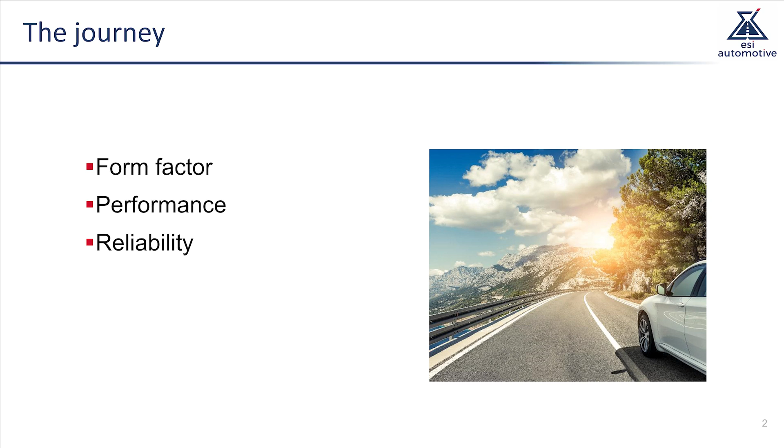Today, we will discuss the testing required for ADAS and explore a necessary material change to achieve enhanced reliability. The focus will be a high reliability solder alloy. As we create a supercomputer on wheels, we have to consider the significant influx of electronics in each system and what that means for overall vehicle reliability.

So what exactly is meant by a supercomputer? Well, a basic definition states that it has great speed and memory, thousands of times faster than a personal computer. And this is directly relatable to a car's central computer. It must be able to make very quick, informed decisions. It will gather information on its surroundings, pull from a historical log of experiences, previous situations and programs to make an accurate, safe next move.

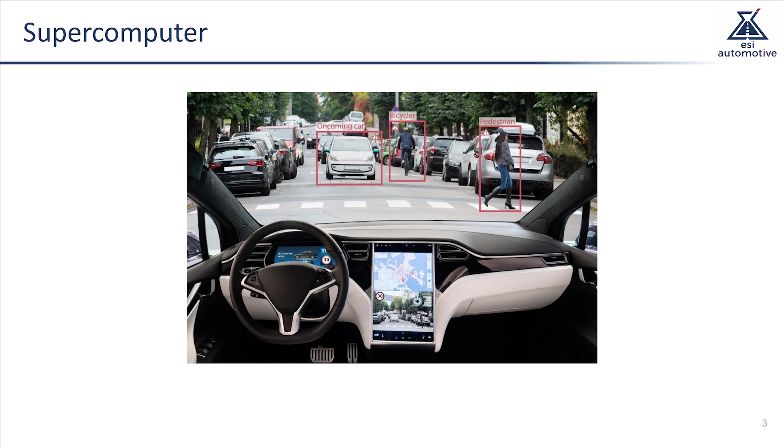Think about yourself. Think about how much information you're taking in when you're driving on a congested highway and you want to change lanes to get around a car that has abruptly stepped on its brakes in front of you. It seems like a basic concept to someone who's been driving for many years, but there's a lot of information to take in and react to all in a fraction of a second. Now we're going to turn this decision making over to a machine that can wear or degrade.

So in our previous installment, we discussed the effect of printed circuit board materials on 77 gigahertz radar designs. Staying close to that theme, today we'll look at the joining materials used for connecting the components to the printed circuit board. We will consider the necessary life expectancy of these systems and the challenges associated to radar, as well as all other advanced safety.

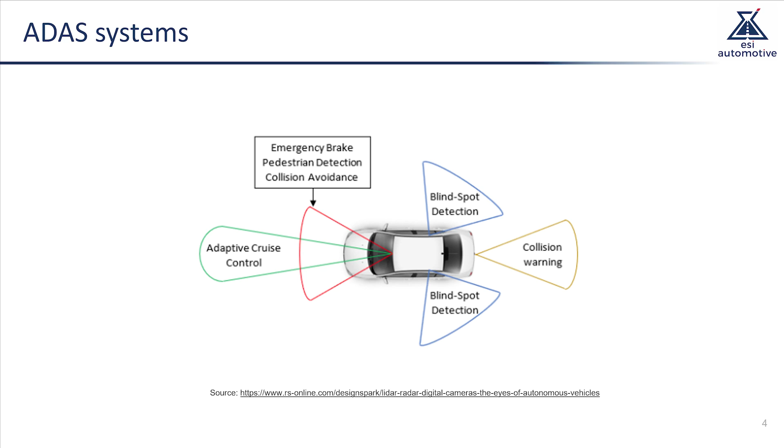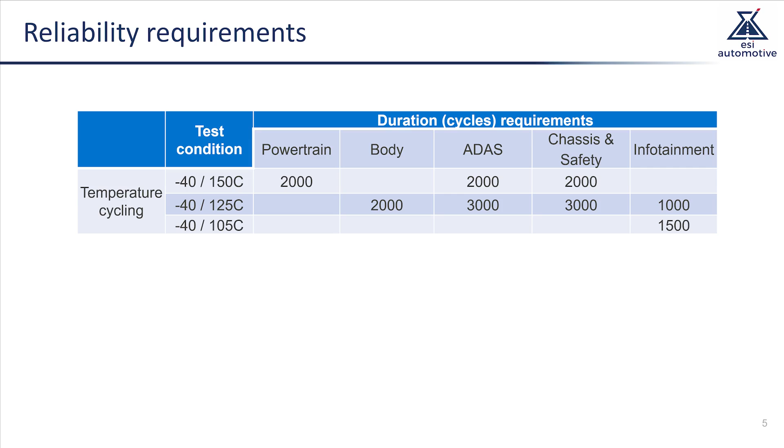Car makers are putting stringent test requirements on ADAS systems. You can see from the chart that the advanced safety systems require the highest number of thermal cycle exposures. But the greatest concern for an electronic system is thermal fatigue. Thermal fatigue is defined as the gradual deterioration and eventual cracking of a material, usually metal. It's a result of alternate heating and cooling.

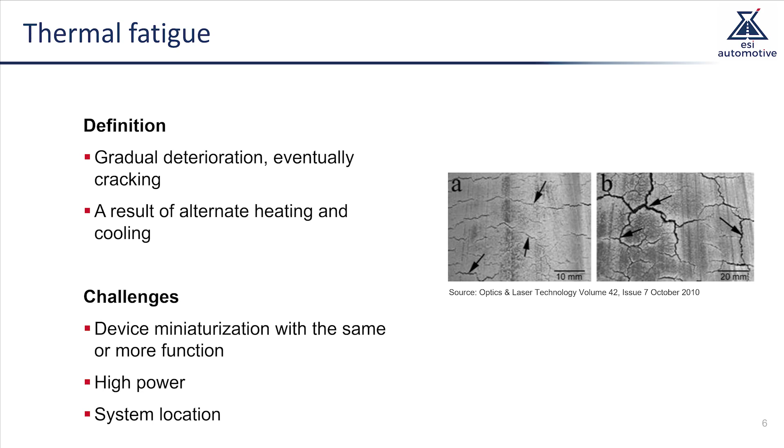And if you think about it, you can imagine that the environment for any car electronic is pretty aggressive. Think of where these systems are. Next to the engine, baking out in the sun, they get really hot. But in addition to the location, the function becomes a thermal concern. We have a significant concern for advanced safety systems due to the amount of processing power that they require. These systems are getting hot just simply from running, simply from doing their own function.

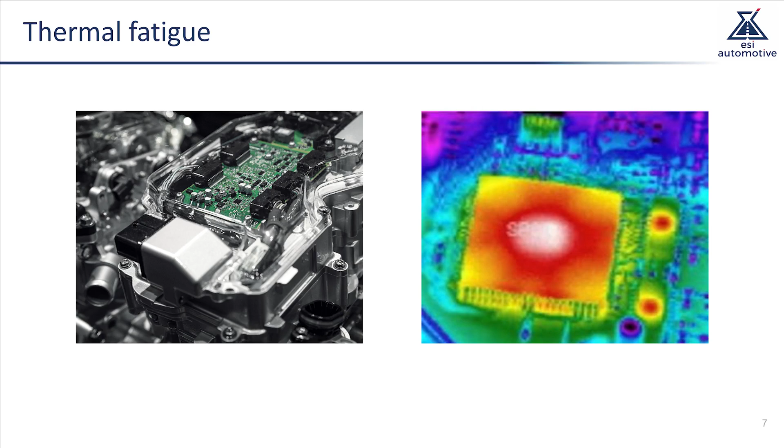The image on the right is a thermal scan showing the hot silicon die at the center of a substrate package. So let's look at the impact that heat has on the electronics. We start off with the backbone of the design, the printed circuit board. It's a glass fiber weave, kind of like a sheet. Holes are then drilled and copper is plated to create the circuit, and then finally a surface finish is applied. There's about 180 other additional steps which we can't get into now.

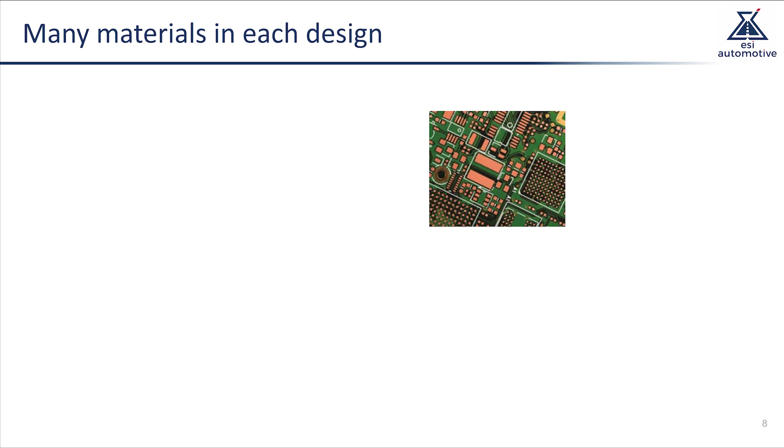But after the PCB is finished, solder paste is applied. This is a paste material containing organics and small metal spheres, which then get heated, the organic is released, and it melts into an alloy. And finally, this joining material is taking semiconductor packages and IC substrate components and soldering them to the surface of the printed circuit board. This is the brains of the operation, right?

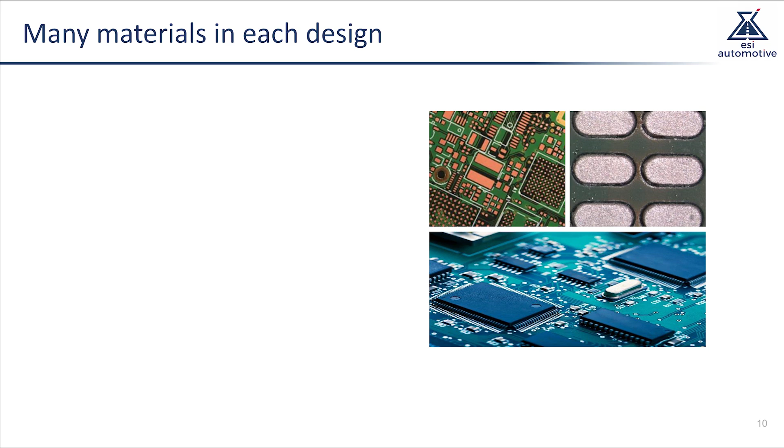The silicon chip gives life to the electronic. But the chip also has additional metals and plastics. So essentially, there's a lot of materials coming together to make all of this work: organics, metals, metal alloys, and plastics. And when we bring these things together and heat them, they all heat at a different rate and they expand at a different rate. And we call this the coefficient of thermal expansion, or CTE mismatch, the fact that all of these things will move differently at different times.

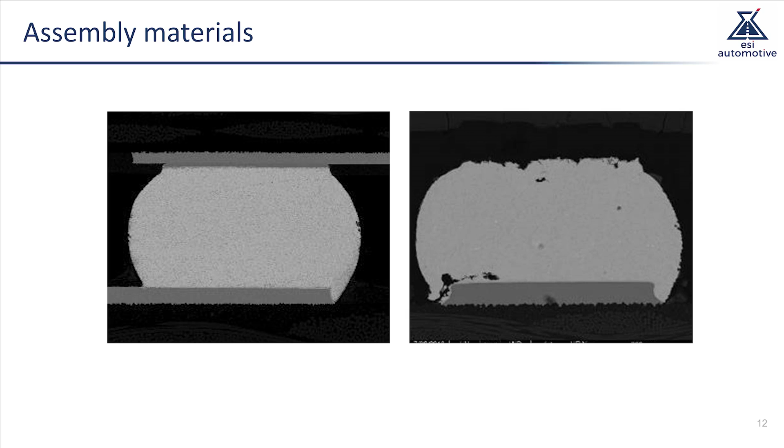The predominant area of weakness is the solder joint interface. Thermomechanical forces put stress on the solder joint, and eventually that stress releases through a crack, and this crack can become an electrical failure. The best way to eliminate this failure would be to enhance the solder alloy.

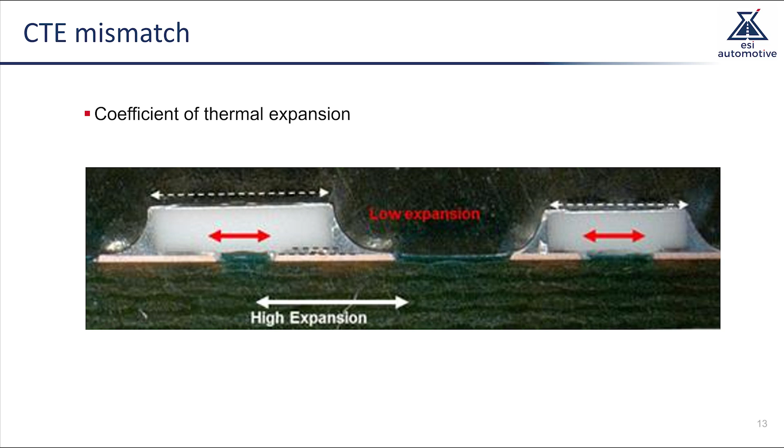So again, if we look at this picture, you can see there's the packages on the surface of the board, they have certain materials. Solder paste is attaching them to the printed circuit board via a copper plated pad, and that's on top of your glass fiber resin substrate. Again, many materials that are going to expand and contract at different rates and likely in different directions.

And now we're going to put more function into the packages. And the solder joint is actually getting smaller. Again, the point is, as we advance, packages are getting smaller, but they're processing more, so they're getting hotter. And this puts more pressure on the solder joint. We must stabilize or improve the materials.

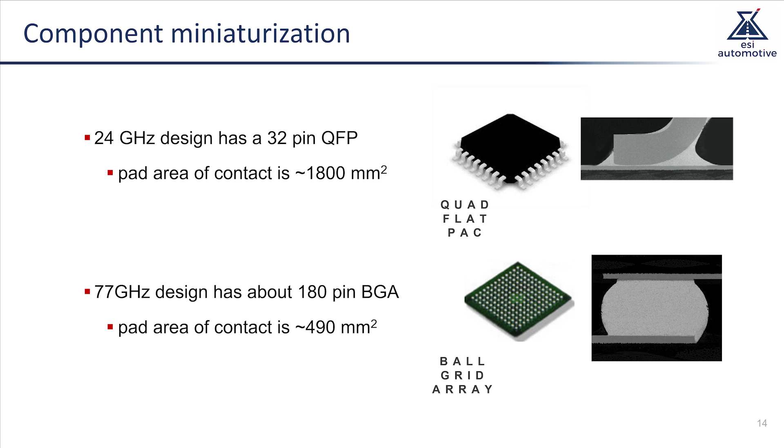Again, the best way to combat solder joint pressure is an alloy enhancement. We alter the alloy movement to reduce fracture. And we do this through alloy development, such as solid solution strengthening, diffusion modifiers, grain refinement, and precipitate strengthening. The Innolot alloy was formulated for underhood automotive applications. A more rigid and reliable material was created through Innolot.

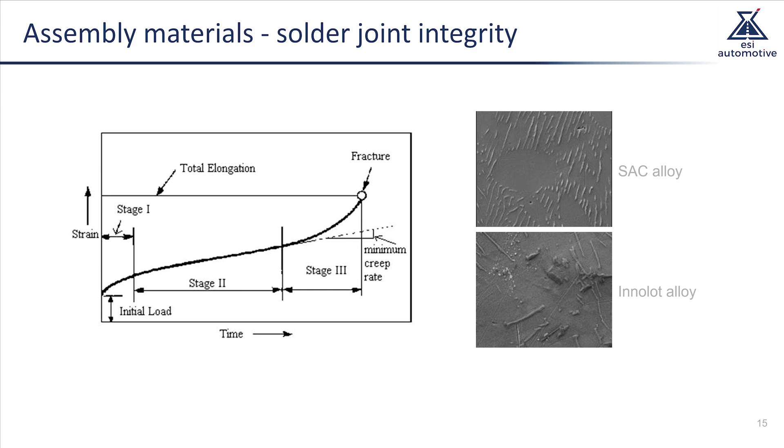And then as we progress to higher levels of autonomy, level 4, level 5, with traffic assist sensors and autonomous driving vehicles, it is likely that you will have to use an underfill or corner fill in conjunction with the Innolot alloy. Currently, our development labs have testing to analyze the results of these combined materials.

And just one more look at solder joint reliability. It can be seen through shear strength. In our internal testing, the data shows that the quantity of thermal cycles has the greatest effect on shear strength, which is measured in kilograms, but that the use of the Innolot alloy drastically improves thermal resistance.

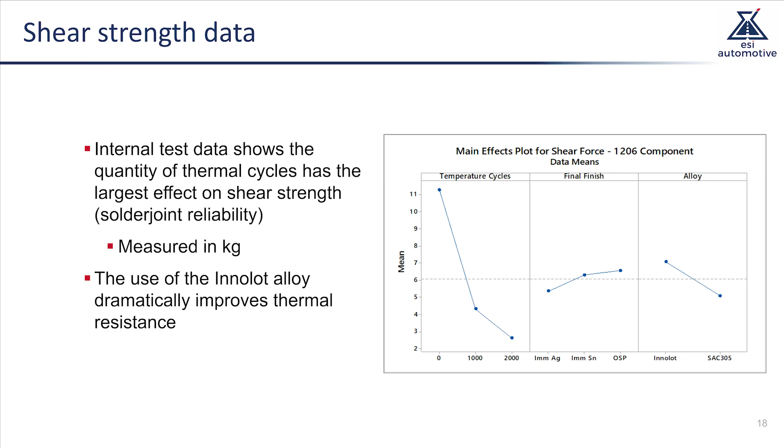As the technology continues to advance, each system will be required to have greater reliability, in many ways defined through thermal and mechanical stress resistance. Our Innolot alloy is the best available improvement for solder joint reliability on the market today. Ultimately, understanding how it performs with your designs will determine the resultant life. But it is a proven product which has been accepted by the automotive industry for over 15 years, previously for underhood applications, but more today for safety.

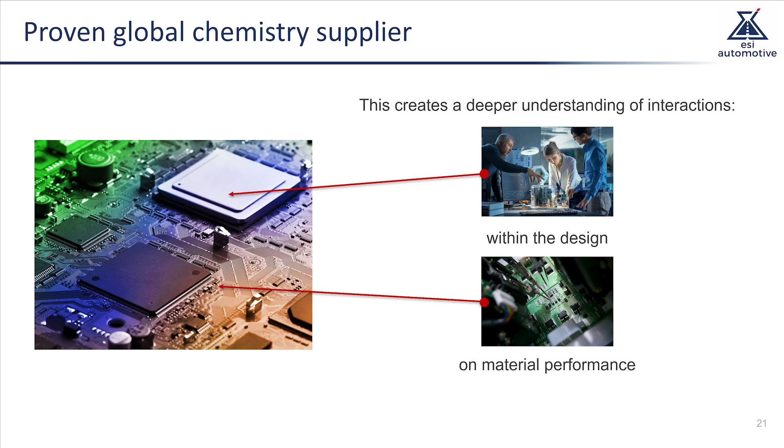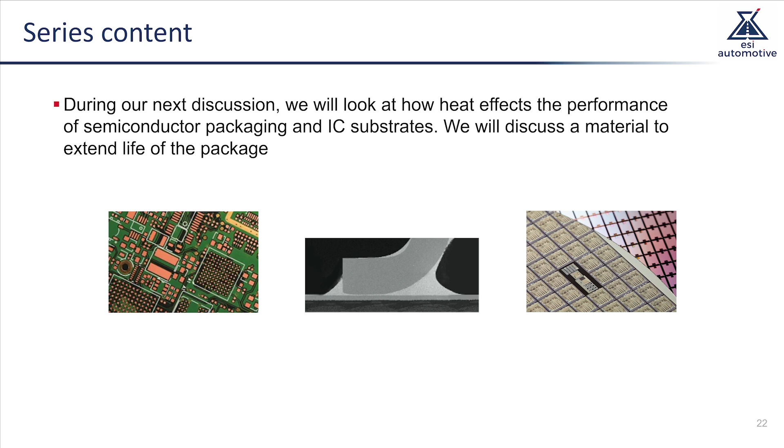In our next discussion, we'll look at how heat affects the performance of the semiconductor packaging and IC substrates. We'll discuss a specific material to extend the life of the package.